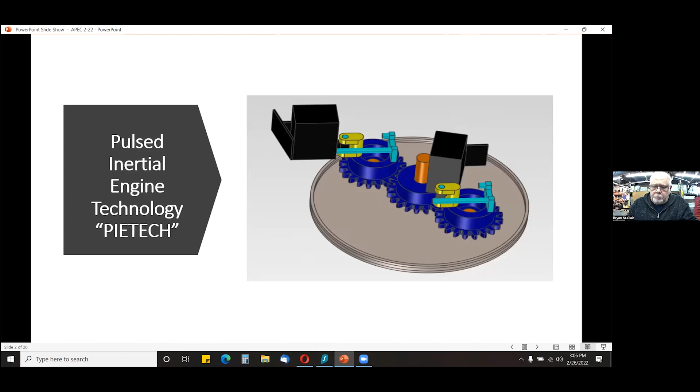It is indeed based on the work of Roy Thornson. Back in the 1970s, he developed one of the very first systems ever to utilize the planetary gear set that we're still using right now, where we have a stationary gear in the middle and the other two gears orbiting that are the ones that are turning. It is based on that. We've modified it quite a bit. Right there is a picture. It's not a great picture, but it is a picture of the demo unit that Roy would use. He would take it around to colleges and potential investors, anybody that wanted to see it, basically, and show them that this is how it works. He was quite open with much of that information.

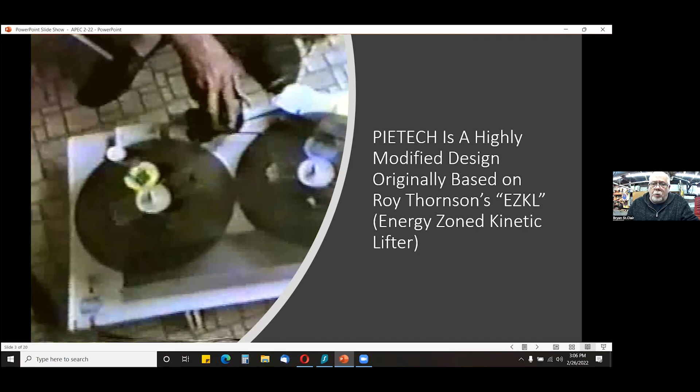As I said, I've been a full-time professional auto repair tech for about 40 years now. I'm now switching the career full-time to parts department operations. I've gone to work in a fleet shop, and I'm doing pretty well right there right now. I'm also engaged in the research and development of several of the inertial propulsion systems, as Tim stated. The PIE, or pulsed inertial engine, is basically a major overhaul of the original work of Roy. He had some things that he never quite worked out, and some other things that I think maybe he did a little better than I would have thought of. So by bringing that all together, I think we've got a system that works actually pretty well.

Now we're in the phase of changing that up and integrating some of that with other technologies that I'm not quite at liberty to talk about yet, but we will touch on that as time goes along. The Trammel engine, or the Pi-X as we called it for a while, has gotten a new motor, but it's not really ready to be used just yet.

Last time I introduced myself, so this time I just want to give a quick recap of where we're at. I've built and tested more than four separate prototypes, not counting the drawing board things that sometimes worked, sometimes didn't, and sometimes only worked if certain conditions were met. I don't count that as true success, but more than four of them actually did present some results in the reactionless propulsion.

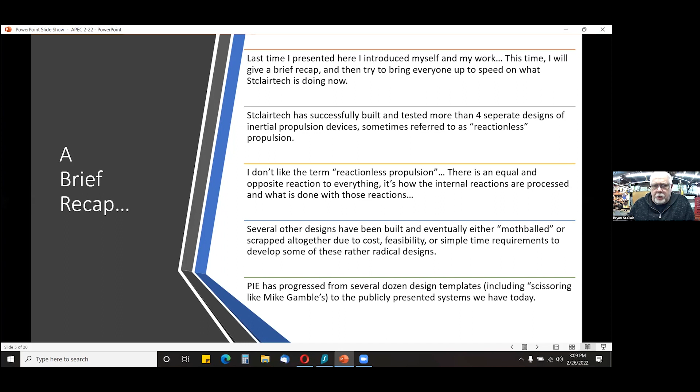I see him on there. Hi, Mike. And you know, there's a lot of different ways to go about getting inertial propulsion. I would rather call it inertial propulsion than reactionless propulsion.

To touch briefly on Roy Thornson - Roy was born and raised in Manitoba. He was a Canadian inventor that originated the use of the planetary gear rotating around the stationary sun gear. Many people have put a gear on the outside and attempted to rotate the planet gears on the inside of that.

It was radical for any government or company to ever really want to do anything with. So it's unfortunate that things went that way for Roy.

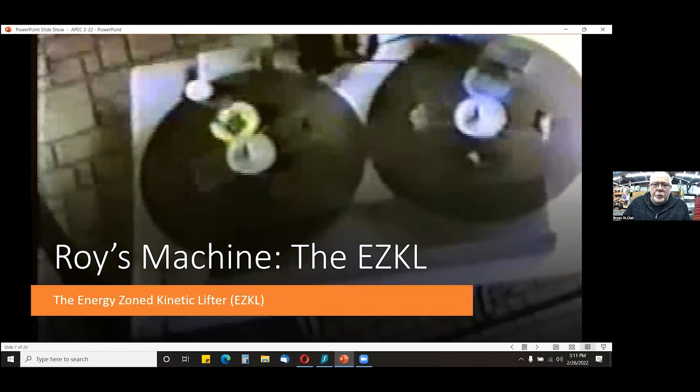Roy built the EZKL, he called it the Energy Zoned Kinetic Lifter. It used not only a planetary gear set with a weight on each of the planet gears, but also a magnetic or mechanical braking system that changed the way the weights were allowed to move. As the weights would sling out, he used a brake to keep them in until the right moment and allowed them to sling out and help with his inertial propulsion.

It did function, but it relied very heavily on the impact of the weight on the center pin, and had tremendous amounts of mechanical losses due to the brakes he installed trying to control how the weight was slung in and out.

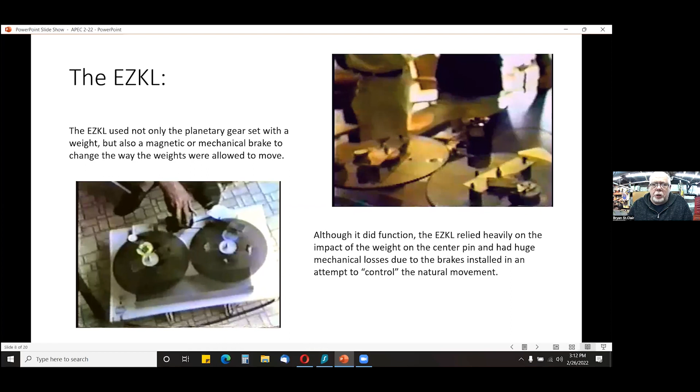Similar to that, our system is not allowed to cross center. You can see in the pictures, the first three on the left - that's the old original PIE 1, which I've still got. It was so reliable and worked consistently all the time that I don't want to take it apart, I want to keep that around. Starting from the left, we have that moment of impact when the weight is contacting - the weight contacts the center pin in the center picture of the three. Then the moment the weight exits that center pin is what he was controlling with his traps, brakes, or whatever he wanted to call them at the time.

That was a major difference in how we went about it, in that we put a ramp extension on the end of the weight to control that moment of release. Of course, it has to be timed, so that takes a little bit of finesse, a little bit of R&D as far as when that release is optimal, and therefore how long that ramp is going to be.

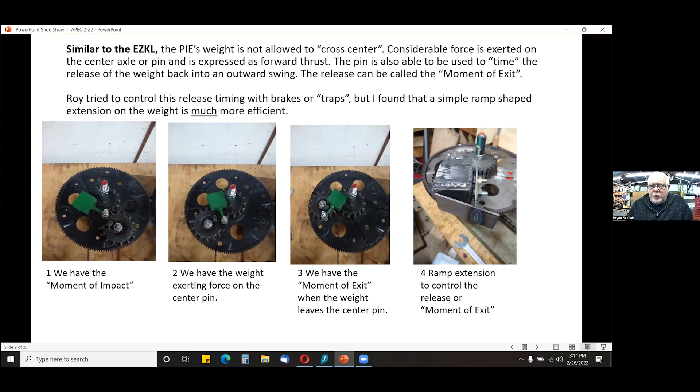The photo on the right, that was the very first ramp that we tried. That's also connected to one of the dead blow weights that we developed. He didn't use a stop for the weight when it came around. It would simply sling to the outside, and sometimes it would go beyond that center point, the outermost reach. So that was another thing that we developed that Roy never used.

If you look at the four pictures on the right, the very first one was the very earliest, and I mean the earliest. That was the very first set of gears that we ever played with. The weight is literally a nut welded to a bolt, spinning around. So if it spun too many times, it would either wind down or come off. And it literally just had a 17mm socket stuck on the end as the weight itself. But that was the very first time that we saw that this was a viable technology.

As we progressed downwards in the photos there, the one at the lower left, that was the four-wheeled Thornson design that if you go to my YouTube channel or my website, you can see that moving across the workbench. It does work. That was the first one that we used that stop on. You can see that they're basically just little pieces of angle that are welded in place to keep that weight from going too far. Those weights were just a piece of pipe with lead poured in the center of them. I mean, very, very crude.

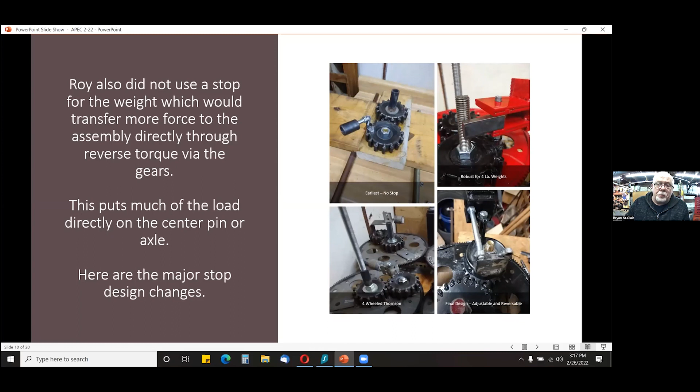And so that was a major improvement over anything that Roy had. Roy had literally some braking systems that would simply hold things in place and then allow it to sling out and spin around when it reached the outer edges. And that was preventing him from building any more power than what he had.

The dead blow weight design, I talked about that ever so slightly. We decided to try something just as an experiment, and that was to build a weight that was hollow and fill that weight about 3/4 with steel shot. The idea being just like a dead blow hammer, whether you're in carpentry or mechanics, dead blow hammers reduce fatigue on the person using it, and also impart the force of impact better because it keeps the impact sustained a little longer when the hammer contacts the nail or whatever it is that you're hitting. So what we did was we took 3/8 steel bar stock and we made it hollow, filled it up, and then welded the cover on it.

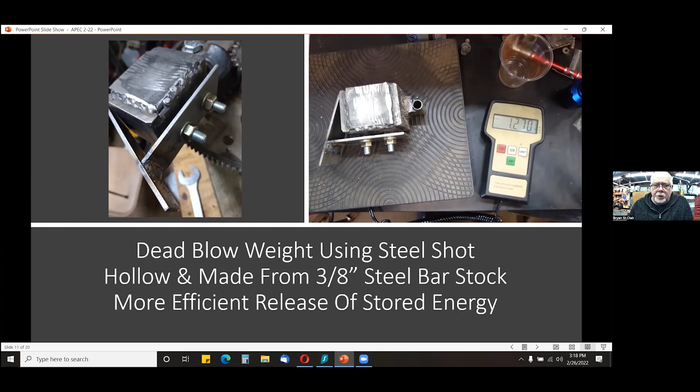That really was a big game changer as well. That's something that was never even intended for the original Ezekiel that Roy Thornton had.

Then we moved on to the speed differential control that adds speed to the rotation at exactly the right moment. And when I say exactly the right moment, it's pretty easy to figure that out. It's right when the motor is working the hardest. When the motor works hardest, it tends to slow down. If it is allowed to slow down, we lose 90% of our propulsion.

And that was something that was a bit of a difficulty that we had to work out in the very beginning. When we were starting out, we just used a belt to run it, and if the belt wasn't tight enough, we didn't even realize it was slipping. So sometimes it works, sometimes it doesn't.

Why is this happening? That was something we had to work out, and we did get it worked out. We run everything off of either a timing belt or a chain now, so there's never a slippage issue.

So it became a point of, since it loses propulsion when it slows down at that moment, what would happen if we speed it up at that exact moment? And that's what we tried, and it sure did work. We were able to control that with a rheostat, a potentiometer on the speed controller for the motor itself, and just increase the speed enough to bring propulsion back up, allowing it to return to normal rotation as soon as it left the micro switch, then do it again at the next moment of needed increase in rotation speed.

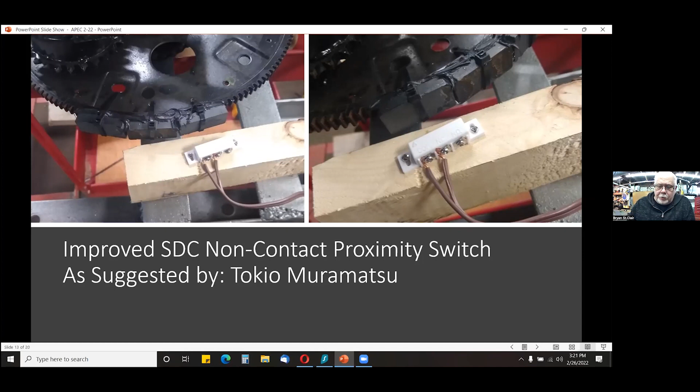We could simply fasten some magnets to the rotating assembly, and when they became close enough to the proximity sensor, that would take the place of the micro switch, speeding it up and then slowing back down when the magnets moved away. So a big thank you to Tokio for suggesting that to us.

And now we come on to the PIE Mini. The Mini Pi is nothing more than a proof of concept demonstrator. We already know it works.

We know what we've got is something that can be used in an automotive, land-based, or even air-based transportation system. I haven't taken it to space—if somebody wants to give me the opportunity or take it with them to space, please let me know. I'll supply you with as many of them as you need to take with you.

We know it works if we simply install it in a motor vehicle. So it came to the point where, instead of carrying 150-pound PIE systems into somebody's office to show them how this thing works, let's build something small enough to set on their desk and let it go across the desk.

As you can see, it's very, very small. Those are 2-inch gears, so the overall arc is very short. The weight is about 2 and a quarter ounces—very, very small, very light.

That overall assembly you're looking at right there, I'm powering it up off of just a cheap cordless screwdriver that I picked up at one of the tool places. The overall assembly weighs about 8 and a half pounds, which is a little much, but most of that weight is in the axles.

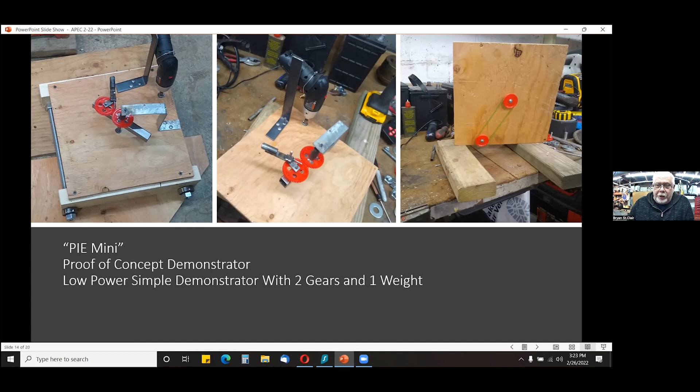So the Mini Pi, as you can see over on the right, we just did a couple of quick little pulleys to make it run off of the cordless screwdriver, and it does work. Is it really useful for propulsion? No, but that is just our little proof of concept demonstrator.

Now we know that they actually work quite well for drawing elliptical circles, depending on whether they're a 4-channel, 6-channel, 8-channel, or however many slider slots somebody wants to build it with. They do work, and it took that do-nothing machine and made it a do-something machine. That's kind of our tongue-in-cheek way of saying we took some stuff that wasn't really supposed to work and put it together in a bit different way, and we're starting to see some results from this. So we just kind of called it the Trammel engine.

It is based on some design factors that are not necessarily 100% my own, and because I've made a promise to keep some of those things private for now, that's exactly what we're going to do.

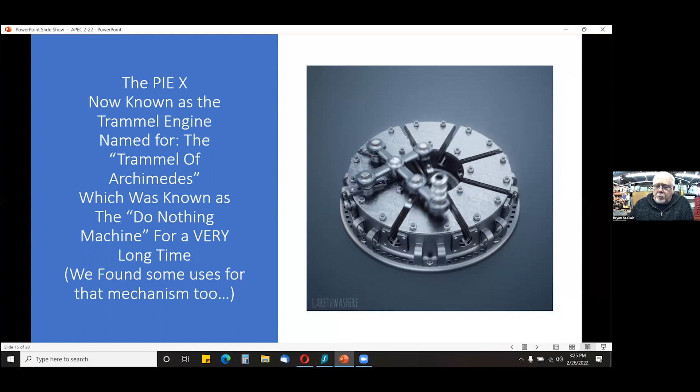We've had some good results, some mediocre results, and some results that were absolutely incredibly inoperative altogether. But it's using something called parallel linear components along with some rotating masses, and it's different.

I really kind of wish I could show you the rest of that later on. I'm hoping I can bring on a friend of mine who has worked with me on this. He's working on a machine of his own that is not a Trammel and not a Pi, but it does use a linear propulsion type system - linear components - and it's more of a training aid than anything else, that we're kind of using to see reaction points in moving linear masses back and forth. If he texts me that he's ready, I'll have him come on for just a minute here at the end, and maybe he can show us where he's at with that.

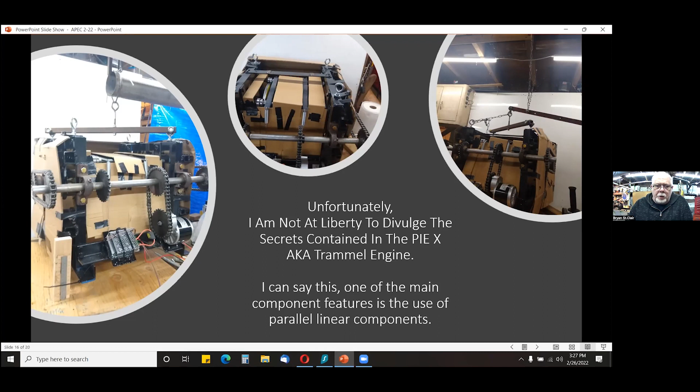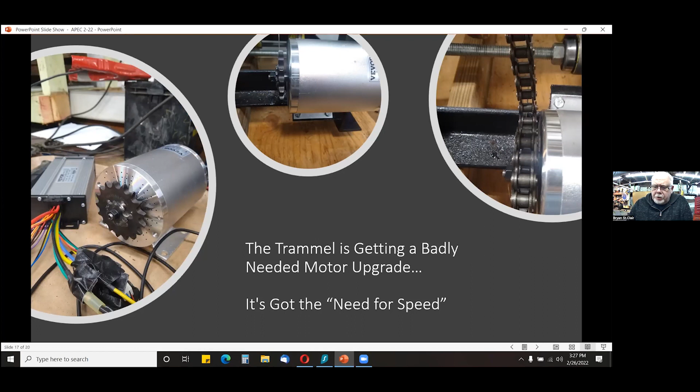The next thing was that we needed to upgrade the motor for the Trammel. That little motor you can see in the previous pictures was only a 350 watt motor, and it only spun at about 350 RPMs. The new motor is a brushless design - 1800 watts, capable of 5200 RPMs or somewhere in that neighborhood. Came with a matching speed controller, and that really does have enough power. It works quite well. You can see there I've installed the bigger gear - they come with a very small gear because they're made more for go-karts and scooters and such.

The difference is it's higher voltage - running 48 volts instead of 12 volts. Runs 5200 RPMs, give or take - we've seen it up to 5800. It runs higher power, 1800 watts. It's the brushless design, so it's much more reliable, much more controllable. And because it came with that matching motor controller, we don't have any issues with compatibility.

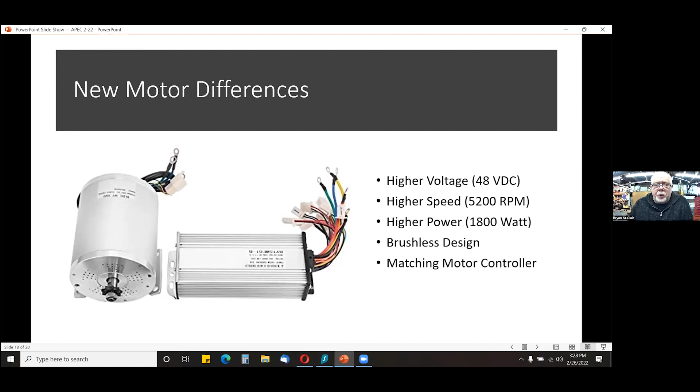I am kind of getting close to the end of my presentation. I kind of warned Tim ahead of time - I didn't have enough for a full hour, unfortunately.

I do want to acknowledge all the terrific folks - Mike being amongst those that have really pushed this technology forward. People like Mike Gamble, Tokio Muramatsu, Steve Hampton, Sandy Kidd, Mike Marsden, Dean Tesla, and a lot of other visionaries that I'm just not going to go into listing off. I do want to give a heartfelt thanks to all of these folks for really pushing this technology forward, and daring to try. A lot of people just don't dare to try it at all - they think, well, this might work, but then that's as far as it goes.